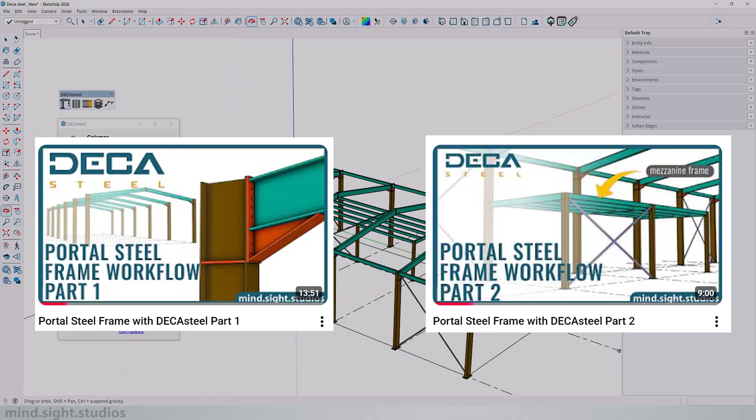The focus of this video is connection details, and we'll be adding beam to column connections throughout our entire structure. We're going to get started by focusing on the mezzanine area.

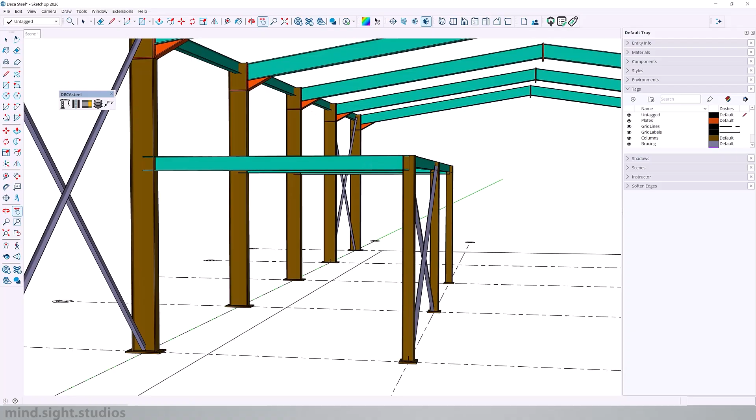In order for our connections to work, we need at least one bolt. This is going to be a 3/4 inch structural bolt based on real bolt standards, and these are the specs that we're going to use.

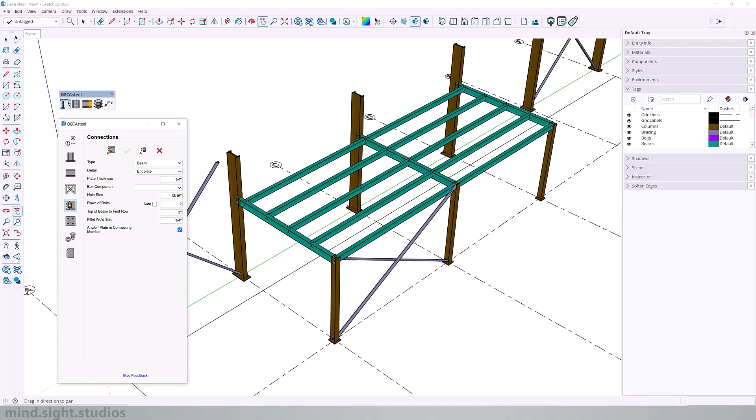We're going to begin by connecting the main beams to the main columns. Switch over to the connection tab and focus on the mezzanine area. We'll choose a beam connection, and for the detail, set this to double angle. The angle profile stays at L4 by 4 by 3/8, and for the bolt, we'll pick our 3/4 inch bolts. For the row of bolts, we'll enable auto, and leave the rest of the settings as they are.

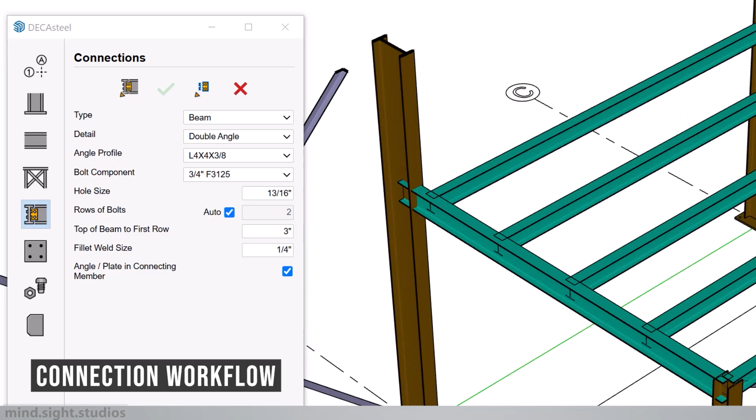Now that our connection settings are set, we can start to build our connection, and the workflow is very simple. First, we click on our column. As you move the cursor over the beam, you can see a preview of what the connection is going to look like, and we click to confirm our connection. That's what it looks like on both ends.

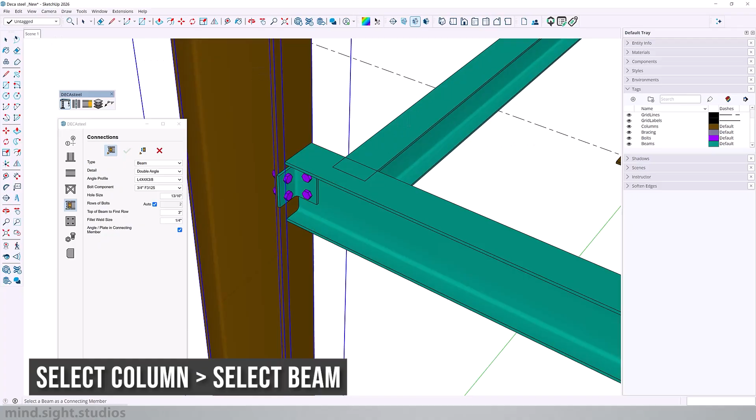To follow through with the rest of the connections, we can just press escape once to reset the connection tool. Once again, we click on the column and the next beam to add the next connection, following this same workflow for the next connection.

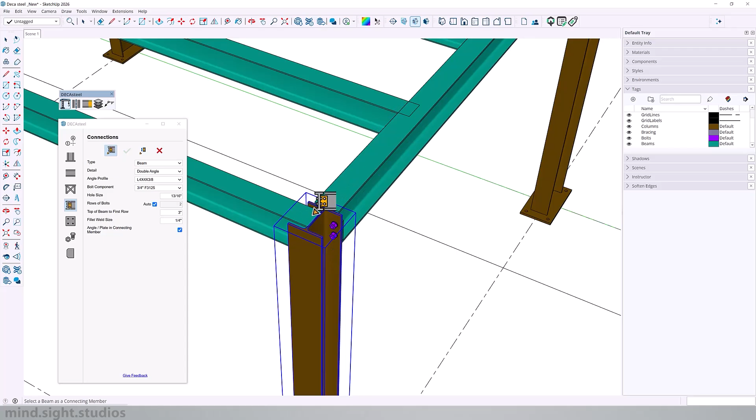Now we can move over to the other side where the connection is one column and two beams. Press escape to reset the connection tool, select the column first, and then click both of the beams, and it will add a connection like that. We continue with the same workflow for the other two connections.

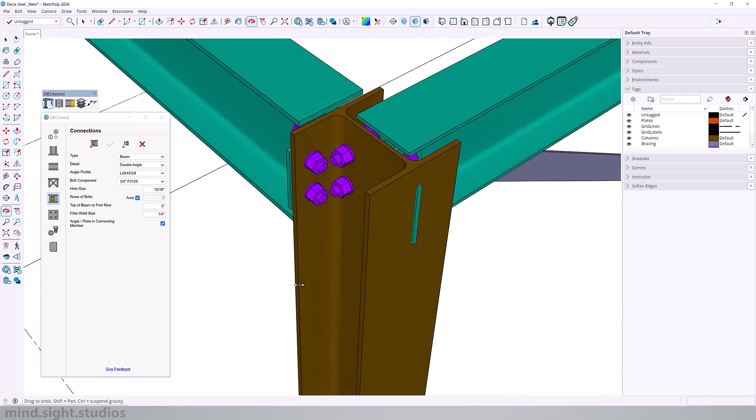Now that we're finished with our connections, we need to do a little bit of an inspection. As you can see, some parts are overlapping this portion of the beam. If you look carefully, it's also overlapping on the other side, and if we look around, it seems to be the case on the other connections as well.

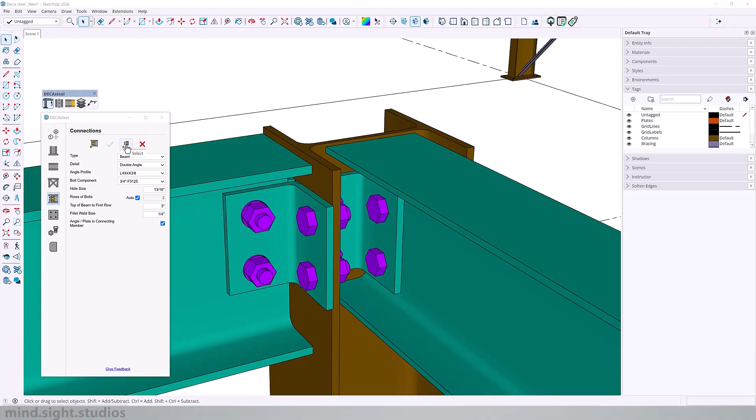So we're going to need to make a few adjustments to our connection settings. Let's use the selection icon to select our detail, and we're going to make a few adjustments. First, we change the detail to a knife plate, and change the thickness to 3/8 of an inch, leaving the rest of the settings as is.

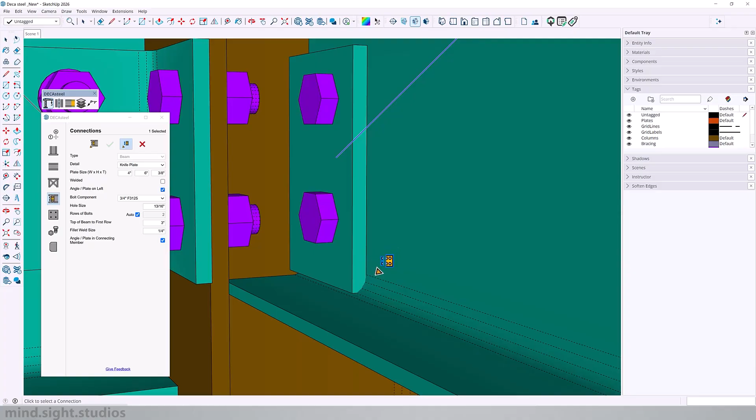Let's update. This adjustment solved the overlap on the column, but there's a little bit of an overlap of the plate on the curved side of the beam. We need to adjust the height of this plate, and we can do this by adjusting the top of beam to the first row of bolts. We change this from 3 to 2.5 inches. Update, and as you can see, the plate shifts up and is now perfectly positioned within the beam.

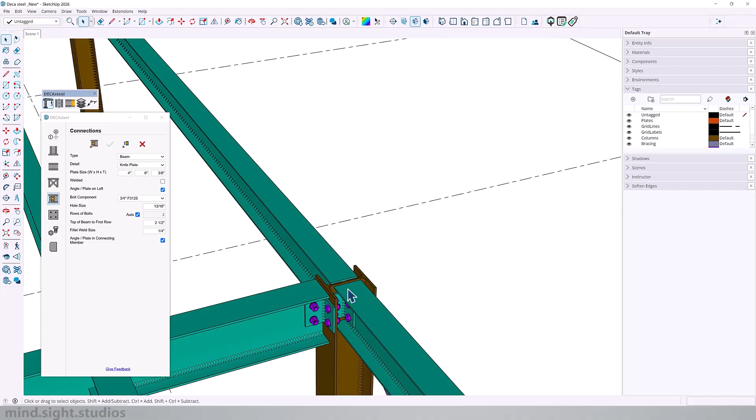To update the rest of the connections, we can just regenerate our connection detail by following that same workflow: select the column and then the two beams, and repeat to update the rest of the connections.

As you can see, a very simple and minor adjustment should take care of all the interference with the plates.

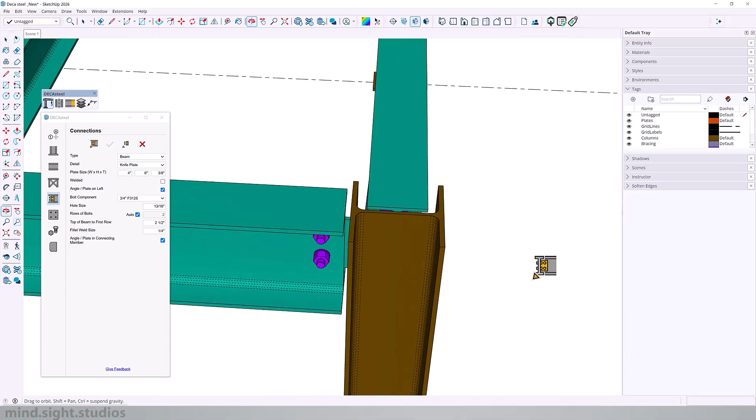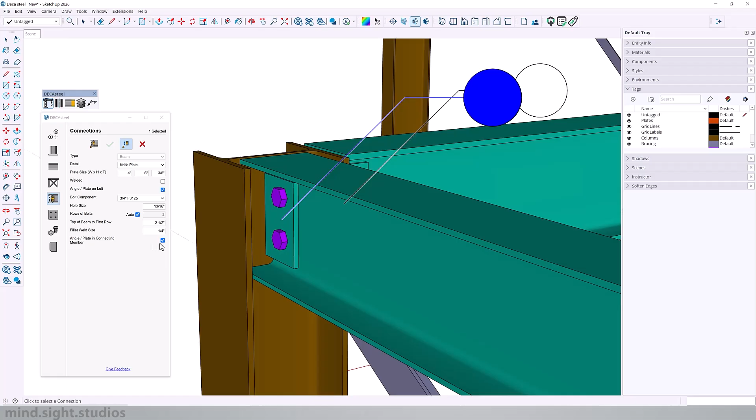A quick pro tip: notice how the plate is the same color as the beam, which indicates the plate is welded to the beam. In this case, we want to invert it so the plate is welded to the column instead. We can do this by selecting our detail and unchecking plate in connecting member. Once we update, you'll notice the plate shifts to the color of the column, indicating it's now welded to that member.

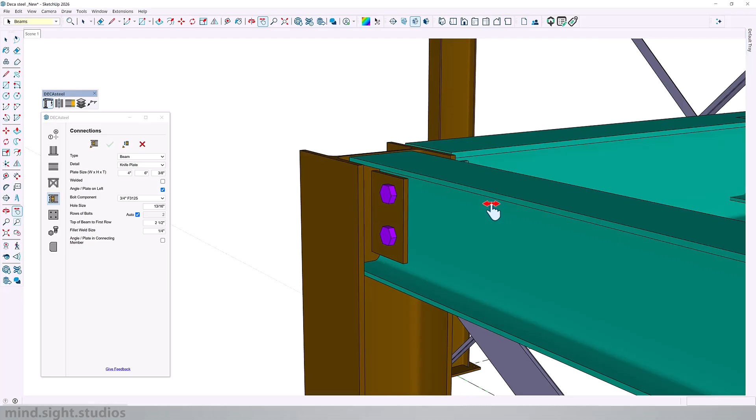Keep in mind this connection will be difficult to install without a block cut in the beam flange, the flange being the top or bottom portion of the beam, so the beam can be lowered into place during installation. You can create this custom cut using the Profile Builder extension, which we'll demonstrate in a future video. As always, the link for Profile Builder will be in the description.

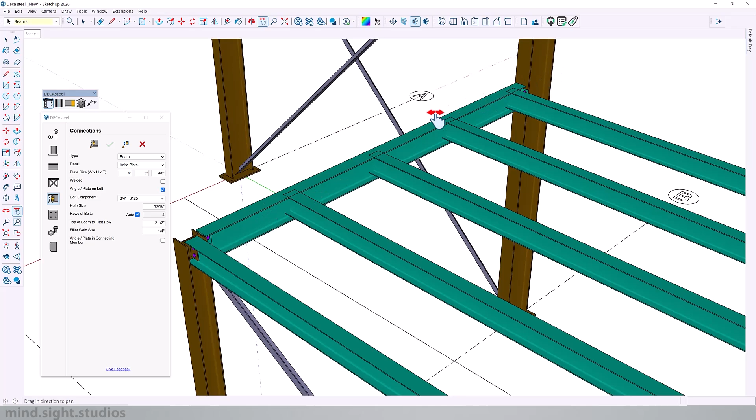Now that we've looked over our mezzanine structure, we still need to add a beam-to-beam connection. So we'll select a top view, switch to parallel projection mode, and go over to Style to enable X-ray.

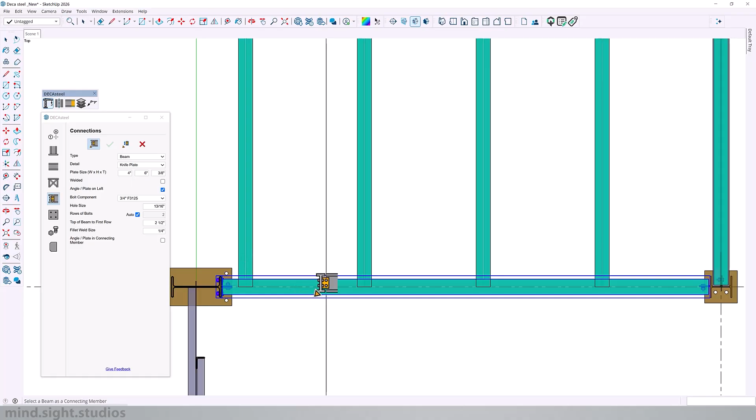Now we can come over to the side of the structure. We'll keep the same settings as they are and activate connection. We select our main beam and then click on the others to create our connection, clicking one after the other to add that same connection repeatedly. I'll press escape, click on the main beam again, and keep clicking to create that connection.

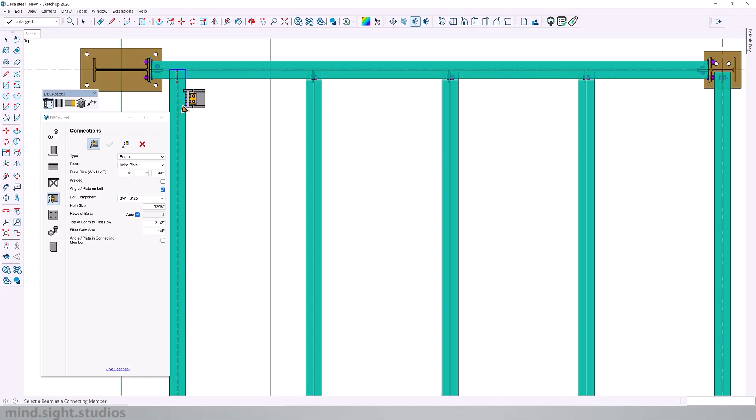Let's deactivate X-ray mode. So everything is looking good and is detailed the way that we want.

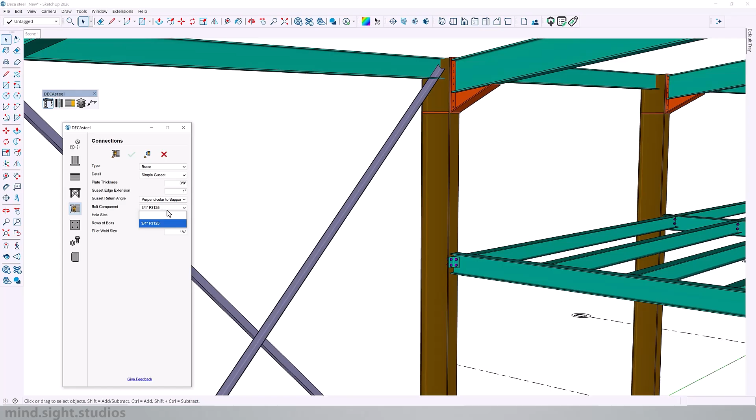Now we're going to take care of our bracing, and we can go back to our connection settings. We'll change this to brace and use a simple gusset connection, changing the thickness to 3/8 of an inch. For the gusset return angle, we'll go perpendicular to support. We'll keep that same 3/4 inch bolt that we created and leave the rest of the settings as they are. Now we can apply our connection.

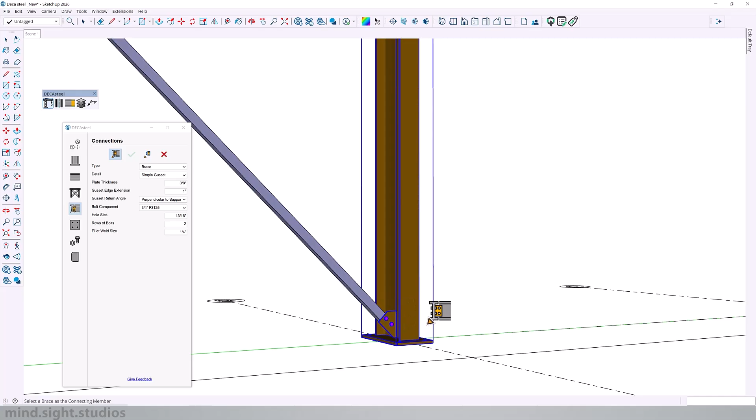We click build, select our column and then the bracing, and there is our connection. Press escape, and we'll follow the same workflow: hit escape once, click the column and then the bracing, and repeat this until we've added all the connections where we need them.

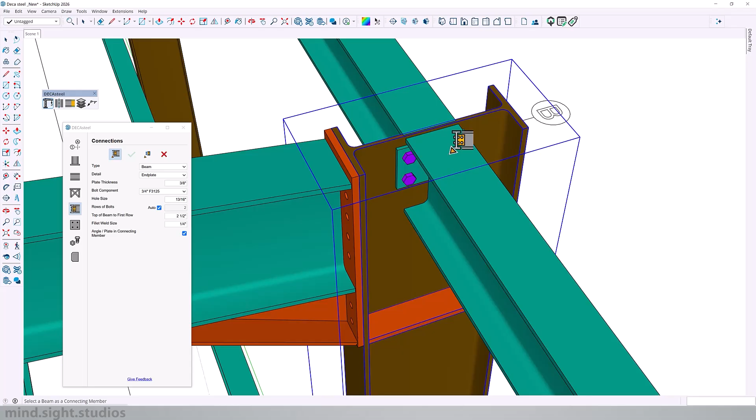Lastly, before we finish up, we can also add connections to the eave struts. We go back to beam connections, select the end plate, and leave the rest of the settings as they are. This time, we're going to enable plate in connecting member. From here, we build out our connection, selecting our column, beam 1, and then beam 2. We can repeat this for the rest of the connections: escape once, column, beam 1, beam 2.